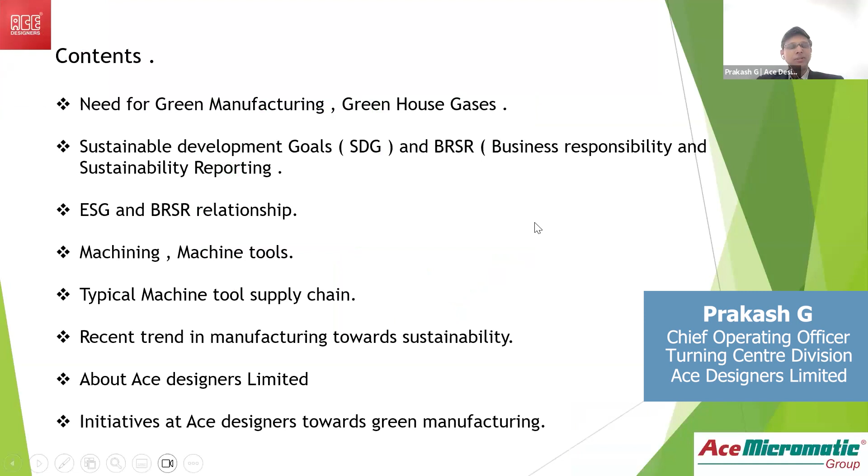Thank you very much. I think this is a wonderful opportunity for me to actually share my thoughts on ESG and future of machining. And to be frank with all of you, the term machining itself is a little contradictory, or it's like the opposite of sustainability. But let me try and do my best to explain my thoughts. Predominantly I'll just focus on a few things on the need for green manufacturing. I think it's been very well deliberated in this session, but a little thought on that.

And I'd like to connect a few things about SDGs, Sustainable Development Goals, and BRSR. Probably it's a new animal, business responsibility and sustainability reporting, which is going to come, and all of us have to get into that. And then, of course, the ESG, or shortly called sustainability, and the BRSR relationship, which I have done a little study on as part of my dissertation in the independent director course through the Institute of Directorship.

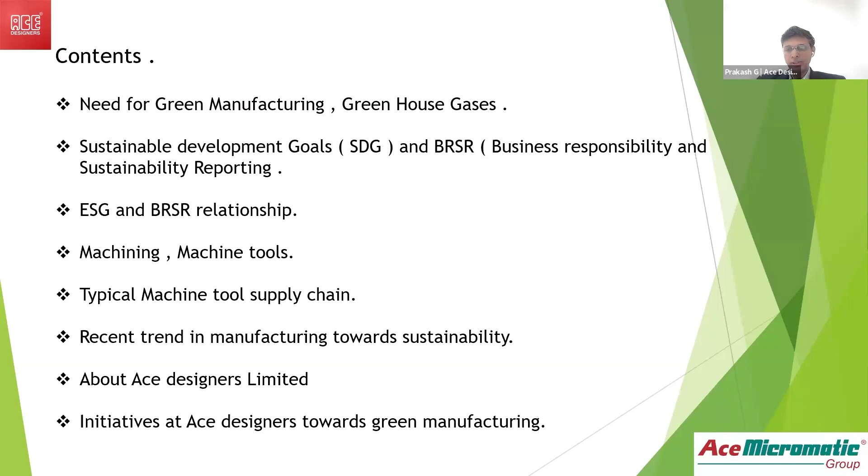Then, of course, I'll talk about machining, machine tools, the typical machine tool supply chain, which is probably not much different from others, and recent trends in manufacturing towards sustainability. I'll talk a little bit about ACE Designers and initiatives at ACE Designers. I think everybody knows the need for green manufacturing. And it's even more felt in the current situations of global warming, climate change, resource scarcity, economic and social implications, and customer demands constantly changing. And the earth is becoming warmer and warmer.

Obviously, the principles of green manufacturing are again going back to the fundamentals. Sometimes I think we need to go back 200 years, where resources were very minimally used, there was hardly any environmental pollution, and energy use was very, very less. And the fourth one is product design, environment, reverse logistics and recycling. I don't want to get into details because most of it was touched upon by Ms. Pandey, that all these things have to be considered if you would like to really look at green manufacturing.

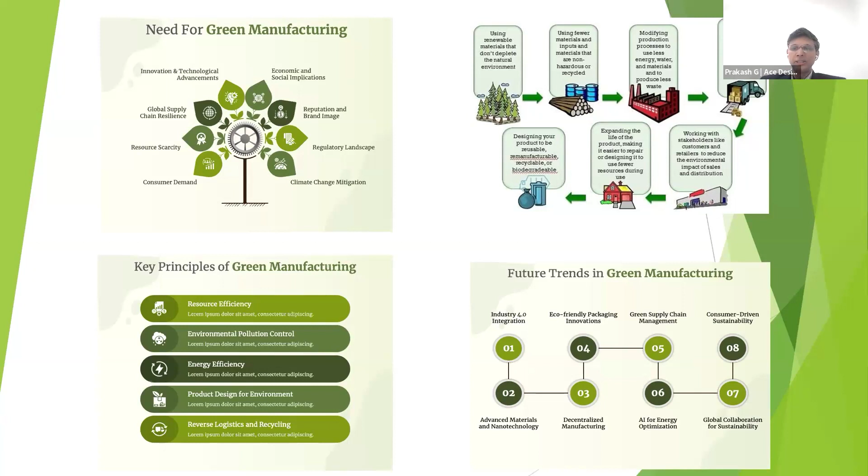And future trends in green manufacturing, some of that was also touched during our discussion. Industry 4.0, advanced materials and nanotechnology, decentralized manufacturing, eco-friendly packaging innovations, green supply chain management, and artificial intelligence for energy optimization. I think Mr. Prahlad was talking about this on energy management systems. Global collaboration for sustainability, and the last one is customer-driven sustainability. These are all coming out as future trends in green manufacturing.

And to talk about the greenhouse effect, everybody knows the reason why we are talking about all this. Carbon footprint is the result of higher carbon dioxide in the atmosphere, resulting in Earth becoming warmer, and less of the gases escaping out of the atmosphere. This right side gives you an indication of which industries are contributing to CO2. Predominantly, in the industry where I come from, industrial processes contribute about 16.8. Transportation is also part of this.

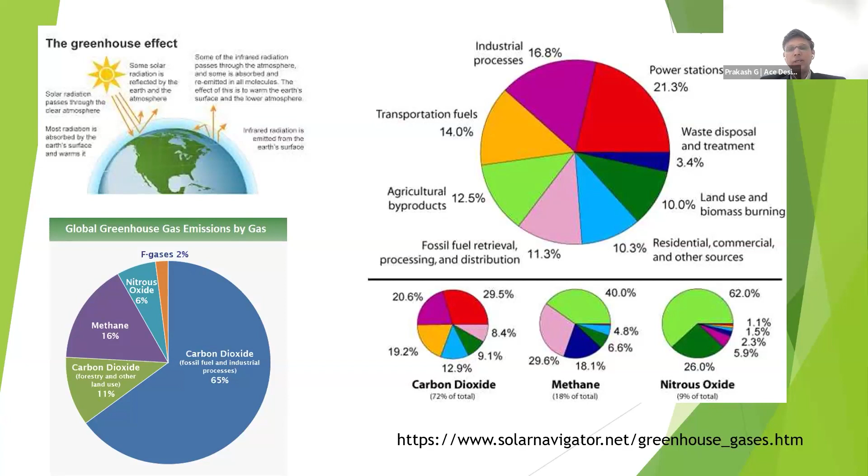Then waste disposal, and probably some portion of land use and biomass burning, because for the waste we are generating, under current regulations we have to dispose it through certified disposal agents from the Pollution Control Board, but still this causes a kind of pollution. So all this is a broad indicator of why we are looking at CO2 as an important element in our sustainability. Let me give you a brief background. Business responsibility and sustainability reporting is actually becoming more and more a must condition.

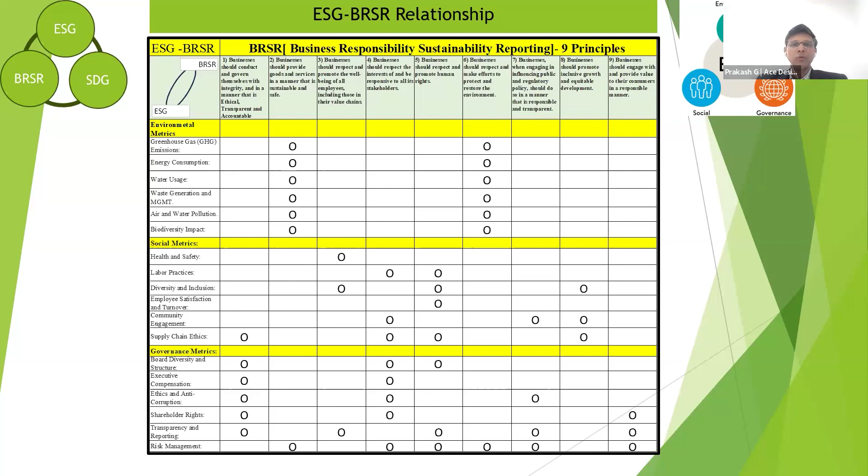Now, when it comes to ESG, environment, societal and governance, and the BRSR, what happens for industries is that if you bring in too many elements, they get confused. Now, how do we look at the interconnections between these aspects? So I found that BRSR has a very strong connect with all the metrics which ESG talks about, the environmental metrics, social metrics, or the governance metrics. So if you are trying to focus on a few of these things, it has an impact on all the other things. That means ESG, BRSR, and SDGs are all interconnected if you take and implement it seriously.

So machine tools actually form a part of capital goods equipment, and it is important to note the magnitude of product carbon intensity in the value chain to prioritize our efforts towards carbon footprint. Of course, we have to set our house in order initially, but at the same time, we need to have long-term thinking: if you want to look at the entire value chain or the life cycle of the product, we have to start from well to wheel or cradle to grave as well.

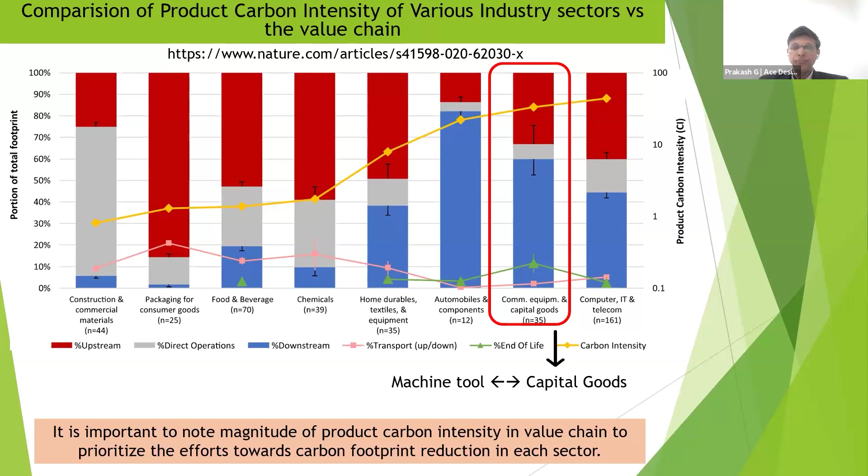And when it comes to machining, as I said, machining itself is a highly energy-intensive operation. So by its very nature, it goes against sustainability and conservation of resources. So if you really look at it, we should not do machining. We should actually use it directly. That's where other technologies have come in.

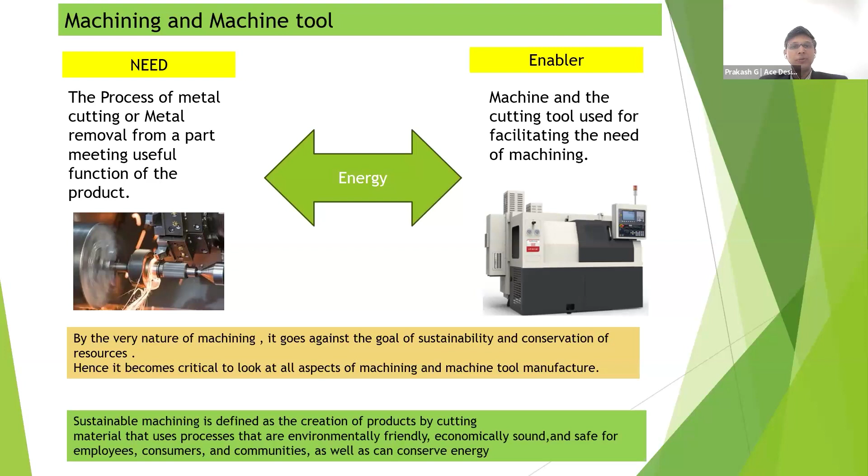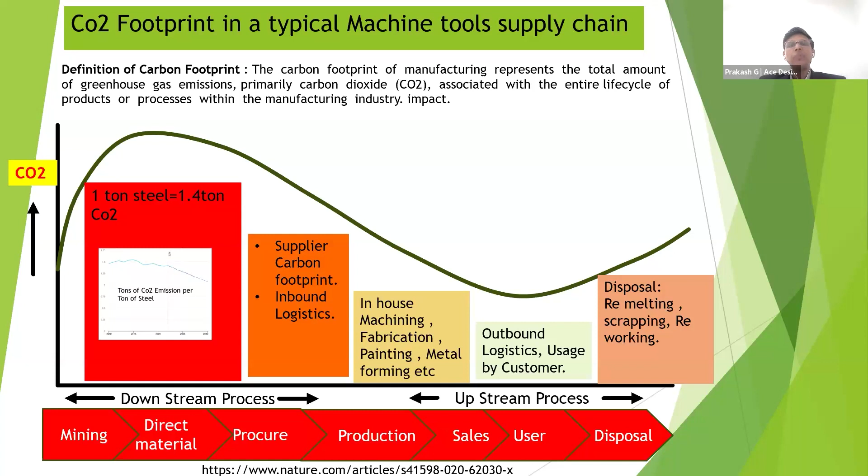I'm talking about a large portion of the product generally consisting of steel and metals, I would say. And what are the challenges you find? Basically, you'll find there are a lot of technological hurdles. Still, as we talk, there is some progress, there are some developments in various materials as well as the processes. And the energy intensity is still very high if you really look at the machine tools.

And of course, the other challenges are regulatory compliance. When I mean regulatory compliance, it's not just the OEMs or the machine tool builder, it's also about our supply chain, the supply partners, MSMEs, and the behavioral change. I think this is one area where I don't know what actually makes this change. Sometimes the government regulations and the rules have to be really enforced to make a behavioral change.

OEM and machine tool builders need to handhold and facilitate their entire supply partners in the journey of sustainability and CO2 footprint reduction. Otherwise, I think people will just try to do what is just required and not go beyond that, because it's like a frog in a bowl where the water is being slowly heated, and it doesn't know that it is actually going to kill it. So if you are not trying to understand the danger of not working on sustainability, it's going to be a problem for everybody.

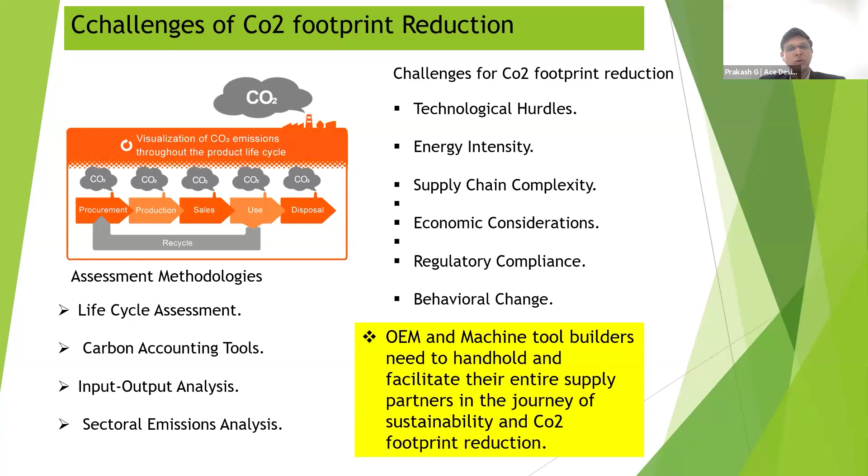There are certain assessment methodologies, life cycle assessment. I think a lot of things are there. Carbon accounting tools, input-output analysis. I think Ms. Pandey will be very well aware of this, and she will be able to throw more light on this. I'd like not to touch more on this.

And the expectation, I think sustainability, if you really look at it, these are some of the things which the OEMs or our customers will be asking. And I would say that the users of machine tools are demanding less and less energy consumption, less air consumption, less oil and coolant, maybe dry machining and like that, and they don't want any machines to break down. It should be zero maintenance. In fact, zero maintenance is a very powerful concept. We have heard of zero breakdown, but not zero maintenance.

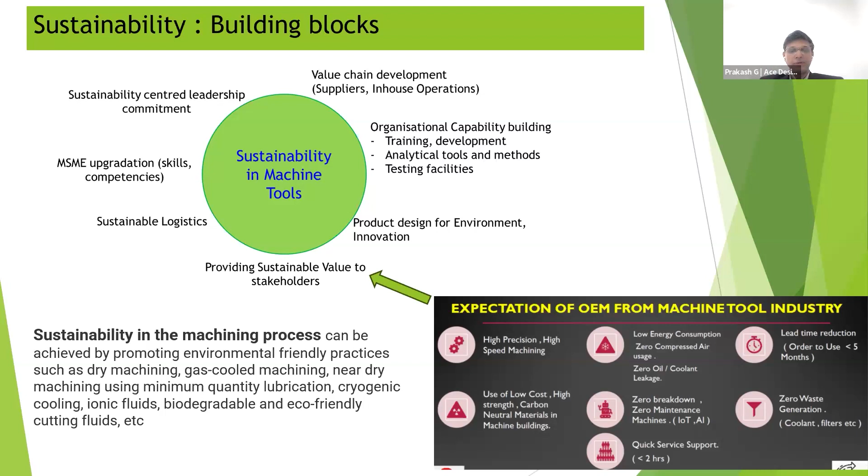And zero waste generation, and that's where the new technologies come into the picture, about how we actually manufacture without really taking out the material from a part. Some recent technology trends in manufacturing towards sustainability are some of these things. Last year I did attend the EMO, which is held in Hanover, one of the world's largest machine tool exhibitions, where a lot of technologies come in, and it's a thing which is happening now.

People are looking at bio-based coolants, natural composites. I think this is very well taken from the aerospace industry probably, and also bio-friendly machine guards or enclosures, low power, no power consumption or optimization of all the energy sources. At the same time, you find that certain technologies are changing the way we are looking at machining itself or the machine tool. Complete solution from printing to finishing of metal parts. Hybrid machining, I think Mr. Prahlad Rao also talked about it.

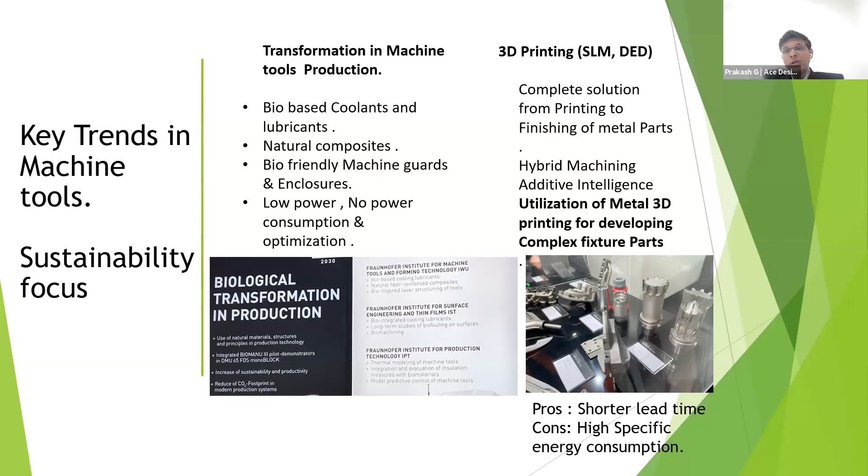But there are pros and cons of 3D printing as well. If you see 3D printing, it is still developing. The pros, of course, are that complexity is very, very cheap in the case of 3D printing, whereas the cons are it has a very high specific energy consumption. Right from the metal powder, you'll have to melt it and then form it. So I think there are a lot of activities going on to further reduce the carbon footprint in this area also. These are some examples of how a machine tool builder is actually trying to look at less energy consumption or resource utilization.

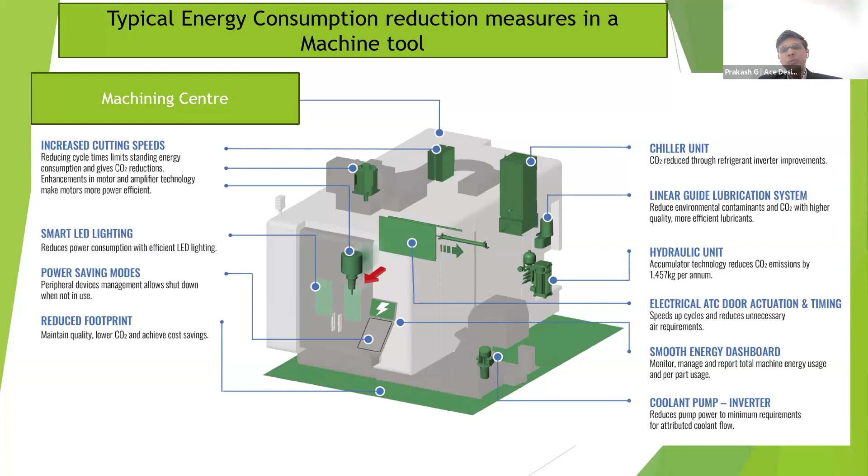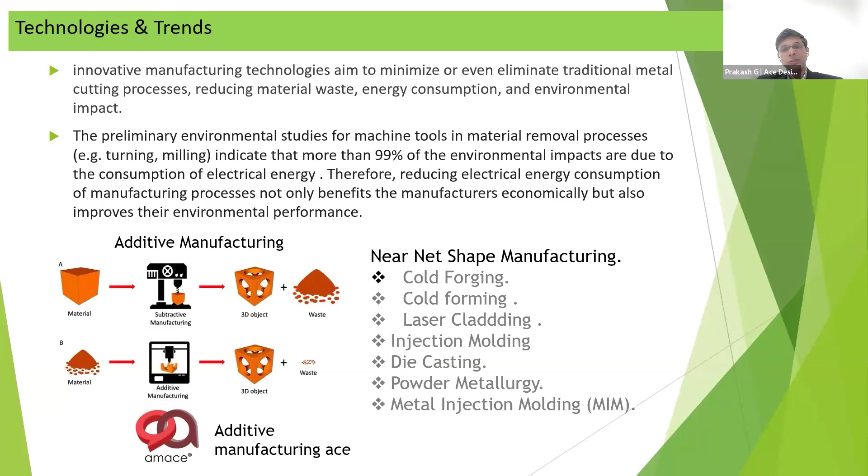And I just mentioned part of that was on the technology, additive manufacturing. I did mention there are, beyond that, not just the metal cutting. Near net shape manufacturing is also evolving. I would say these existed, but energy efficiency was not so much focused on. Now even here, energy efficiency has been very well focused, and it's very much improving also.

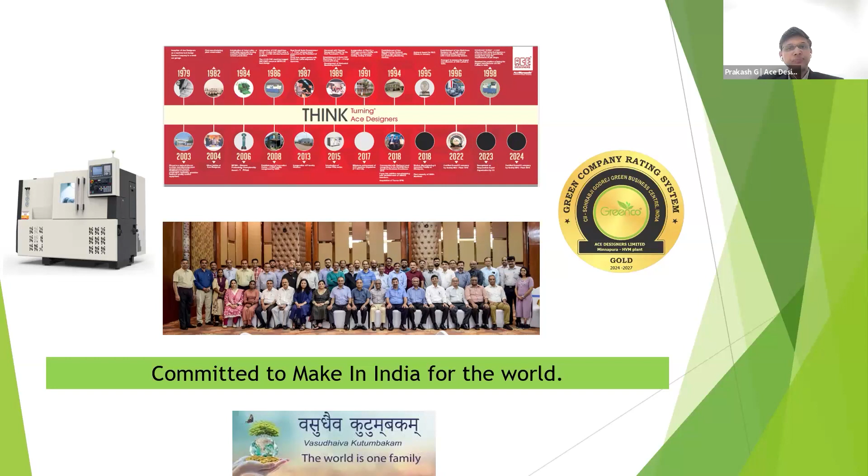Just about ACE Designers, I think we are the largest manufacturers of CNC turning and milling machines, and we started our journey in 1979, and we are committed to make in India for the world. In brief, 3 entrepreneurs from CMTI dared to become entrepreneurs when most machines were imported. They started making machines in a car shed. Now we are the largest, and we continue to work on how we improve further.

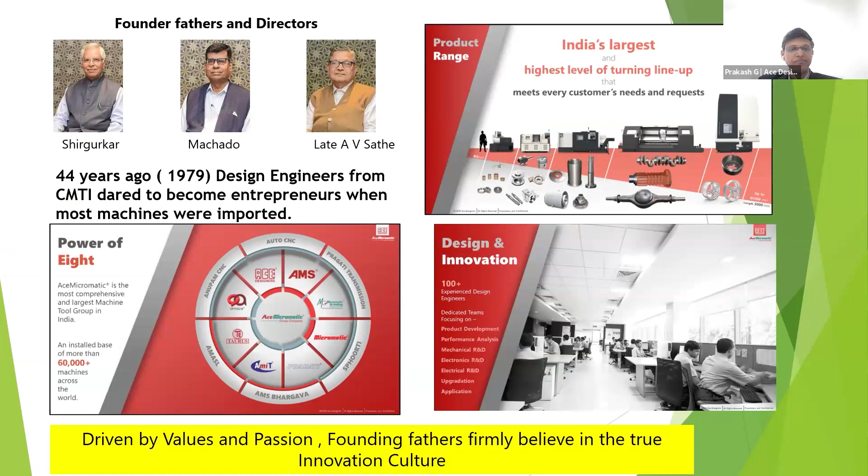Innovation has been one of the important aspects in our development. We have a group of 8 companies. We have a very good design and innovation facility as well. On the sustainability journey right now, while we are trying to meet the legal or statutory requirements, we are actually very serious about going for sustainability through Green Co certification. And recently we did achieve a Green Co Gold certification, which is the national best.

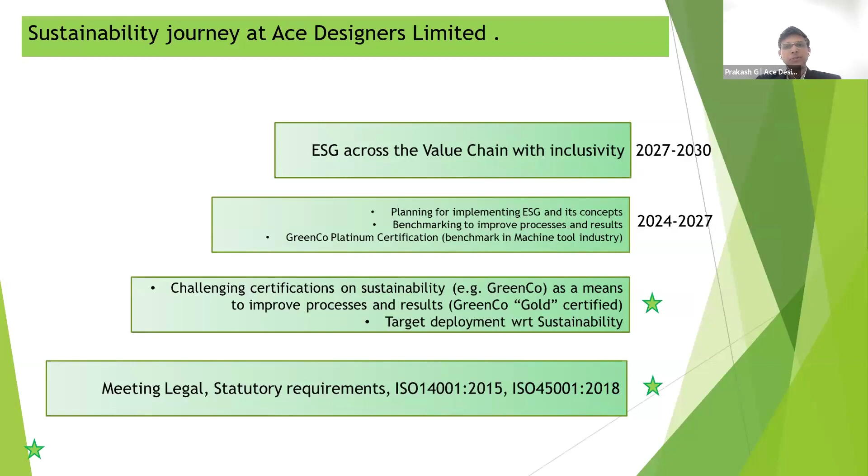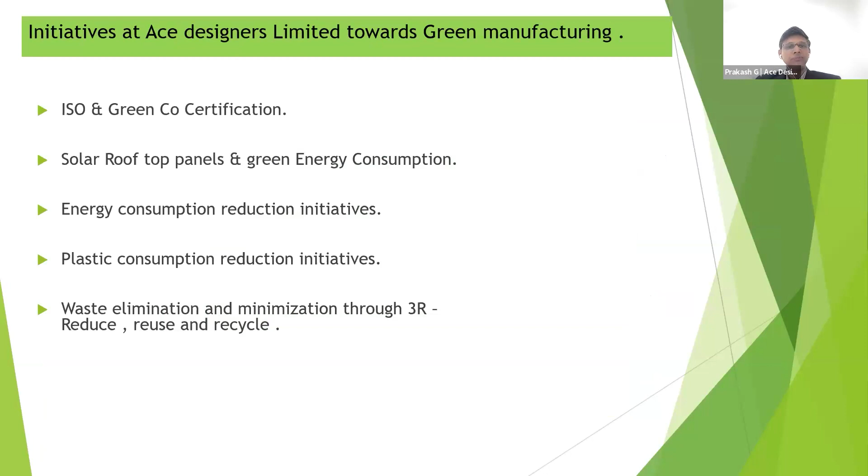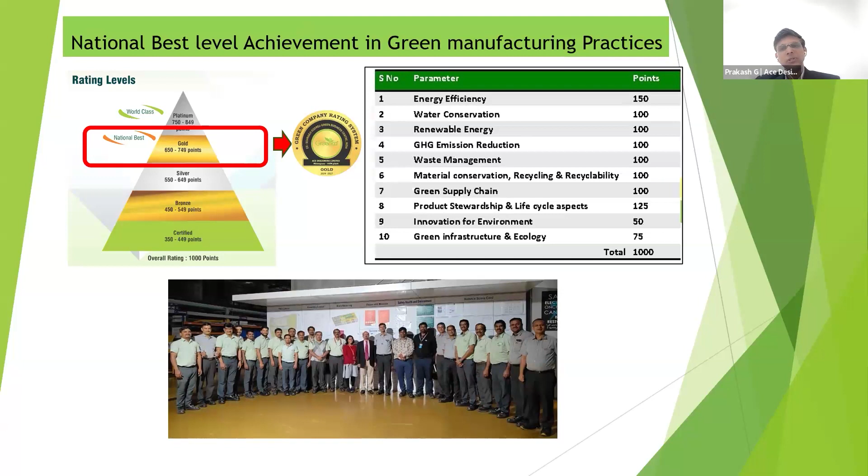Just a few things about our company: ISO, Green Co certification, solar rooftop panels, energy consumption reduction activities are ongoing, plastic consumption reduction, and waste elimination through our 3R. This is one of the things which we have taken very seriously, not just our company, but the entire Indian Machine Tool Manufacturers' Association, IMTMA, has clearly stated in their vision that all machine tool companies have to embrace Green Co and achieve a platinum level where almost everything is addressed, focusing on energy and the conservation of resources.

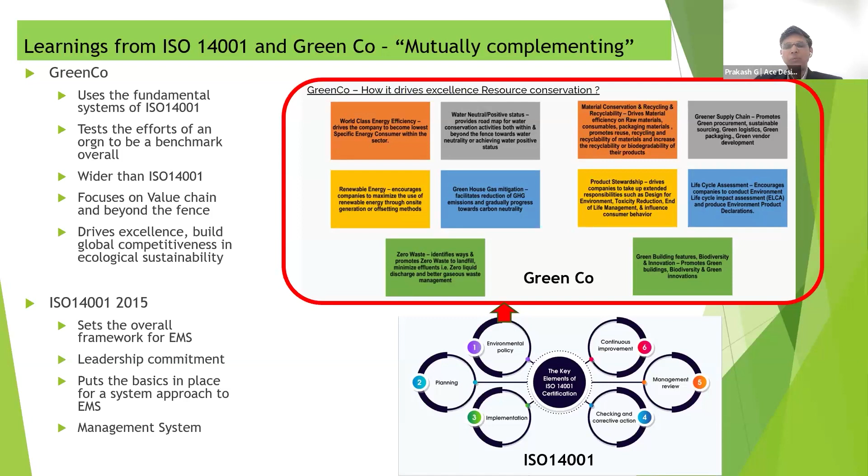I think there is also a confusion when you start looking at so many certifications. Now, what do we do? There is an ISO, there is a Green Co. But through our studies, we found that ISO sets the overall framework for energy and environmental management systems, and Green Co gives much more detail about how to implement it and what things we need to look at. That's why I share this picture with all of you. You will find the details when you look into Green Co, what it means, and all the 10 parameters of measurement.

We are also caring and committed to environmental protection and promotion. We celebrate our Environment Month as a symbol of commitment, where our founders, lead directors, and all employees are committed to green and the environment. And we do have a roadmap towards green energy. We are currently at about 40%. We want to achieve about 90% in our operations.

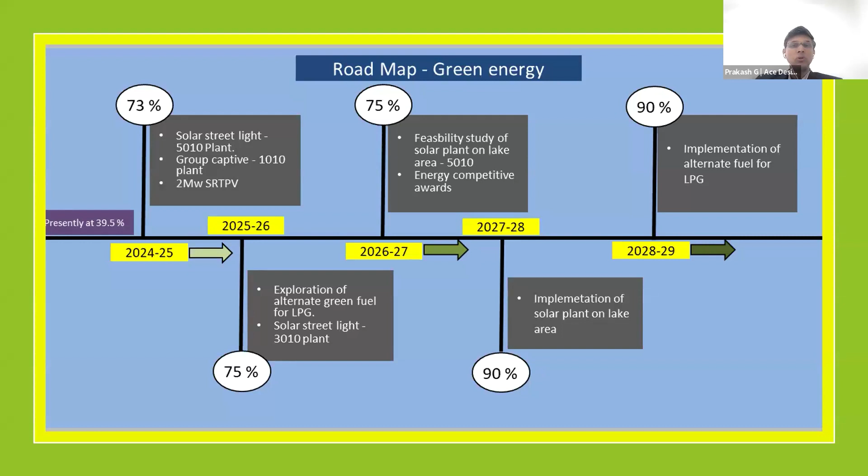And in terms of ESG, which is sustainability that has to encompass all areas, not just our operations, we do have our own roadmap. We are committed to go in this direction, and we have taken it very seriously in our vision and mission. The purpose itself states: impact manufacturing, enrich lives sustainably, which means we are very serious about this, and we are working in that direction.

As a summary, I would like to leave 5 points. ESG is becoming a necessity and a boon rather than an evil for business prosperity. Those who have embraced this have actually got results out of it, not just the top line or bottom line, but it has also become investor friendly. Investors now look at ESG as one of the most important parameters.

Indian OEMs and machine tool builders should embrace ESG practices, collaborate locally and compete globally. I think we should stop competing with each other and collaborate more. We should have a thrust on research and development in material and resource efficiency through collaborative efforts of research institutions, industry, and academia. So we are also working on how we can collaborate with institutions over the long term.

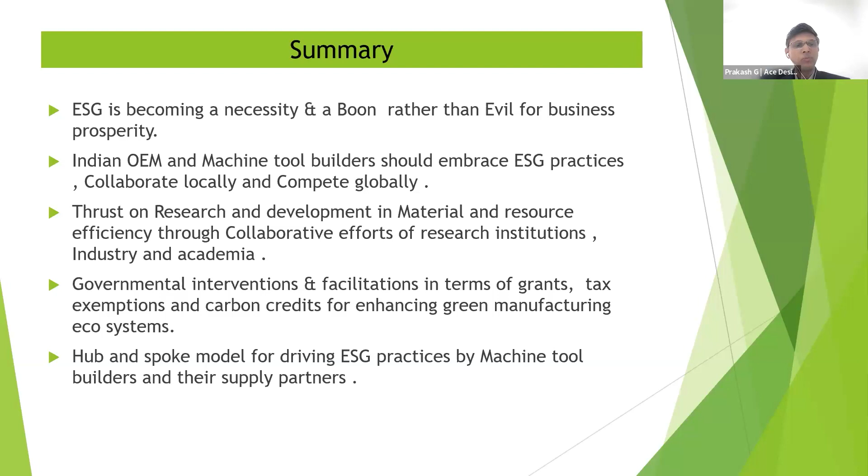One of the important points I would like to make through this medium is that government intervention and facilitation in terms of grants, tax exemptions, and carbon credits for enhancing green manufacturing ecosystems will go a long way in driving this. And a hub and spoke model for driving ESG practices by machine tool builders and their supply partners. So with that, I would like to conclude. Thank you very much for your patient listening.